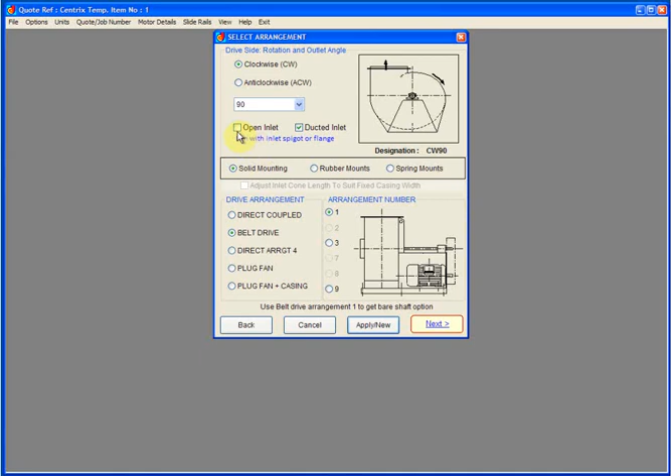So let's do that. This particular fan design has an inlet cone spinning, and what we can do is manipulate this area here to suit different types of inlet cones and the way they're fastened to the casing. Let's have a look at this.

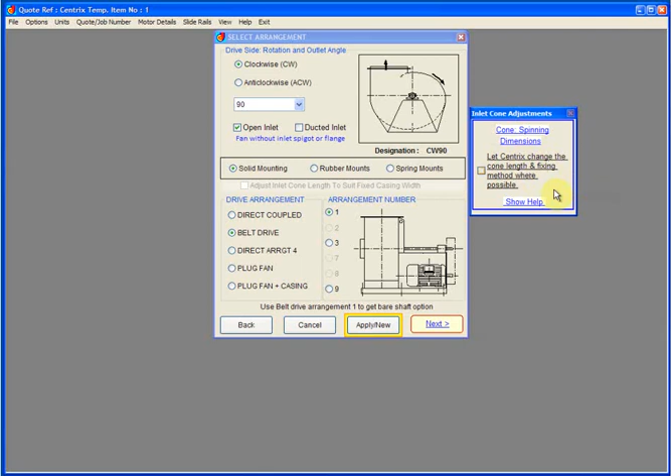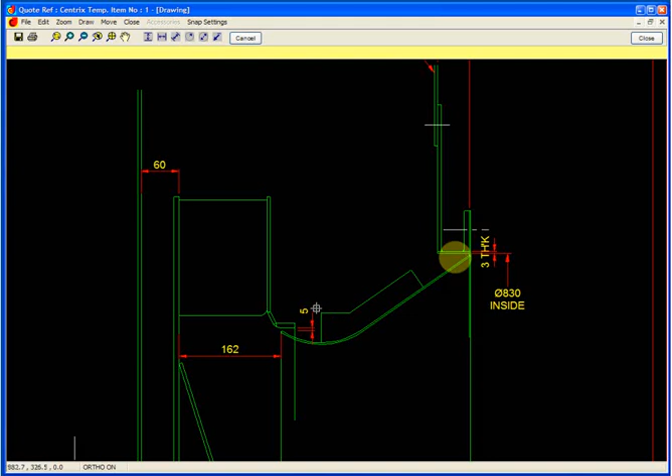At the moment this is unchecked to let Centrix change the cone length and fixing method, so we'll leave that unchecked and apply new here, then next and next, and look at the inlet assembly. This particular fan has a spinning for the inlet cone which needs to be fastened in the correct location, so it has this offset inlet flange so that the inlet cone and impeller are in the correct location.

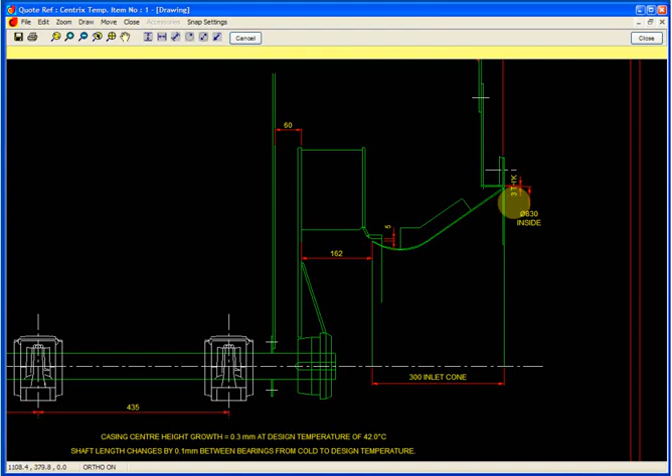That looks okay. So it's an open inlet fan but with this extended section, which means that for an overhung impeller that's going to be fine, but if the impeller was between bearings, then this might cause a bit of a problem as regards fixing the bearing to the side of the casing.

So I'll close that. I'll go to the arrangement number and handing again, and let's see what difference this makes, if any, because we're still using a spinning. Let's say apply new, we'll say yes, then next, next, and have a look at the inlet assembly again.

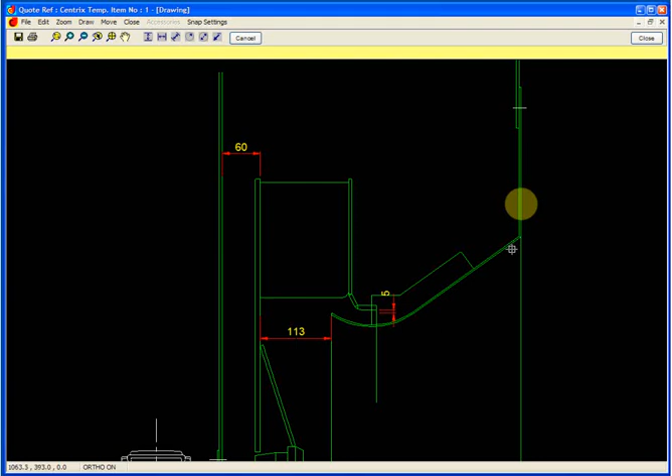Okay, so what we can see is that the spinning obviously didn't have a full flange, so Centrix has maintained the length of the spinning, but of course now it's in the wrong position relative to the impeller. So let's close that and see what we can do about that.

So let's go back to our arrangement number and handing, and we can maybe change the spinning by going back to the casing material selection, unchecking the spinning option. We'll apply that, say next.

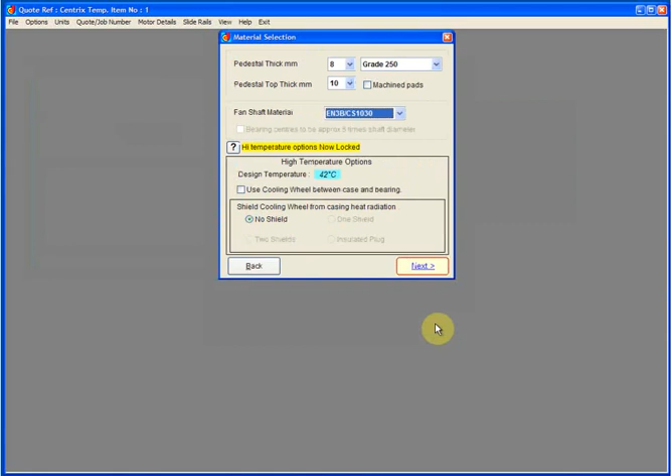Now we can see that the cone is fabricated. So let's say next, next, and have a look at the inlet assembly. And now we can see that the length of the cone has been adjusted automatically by Centrix, and it's in the correct position to get flow around into the impeller.

So let's just have a look at that again, and see what else we can see here. We can look at dimensions. So we can see that the single width cone length in the database is 300 millimeters, and Centrix has changed the cone length to 200 there.

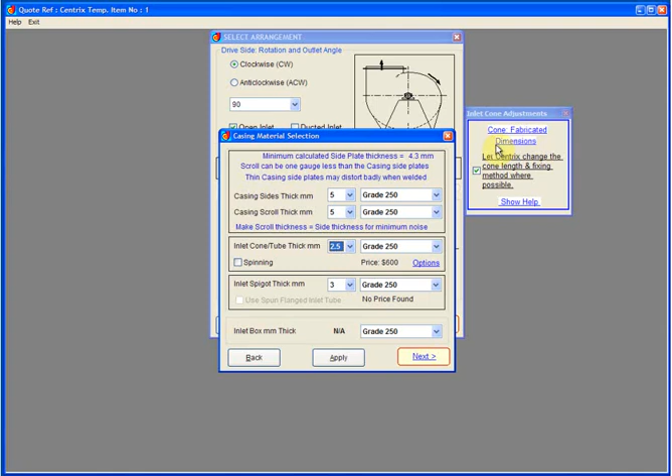We can also change some other dimensions here if we want to play around with these sorts of things, but normally you wouldn't need to, but it's there if you do. For example, we can close that. We could go back to the spinning. Okay, I'll click that, so we're spinning.

Let's just go next and next and draw the inlet assembly. Okay, so now we can see that the spinning's in the wrong place again, as it was before.

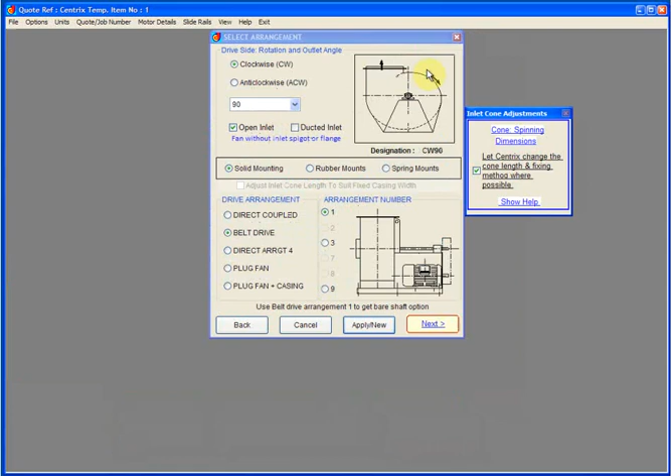So let's now look at these dimensions again, and let's position the cone at the impeller setting. We can actually look at that here. We'll say apply and draw here. So now we can see that the cone length's been maintained, and it's in the correct position, but now we would have to do something in this area here.

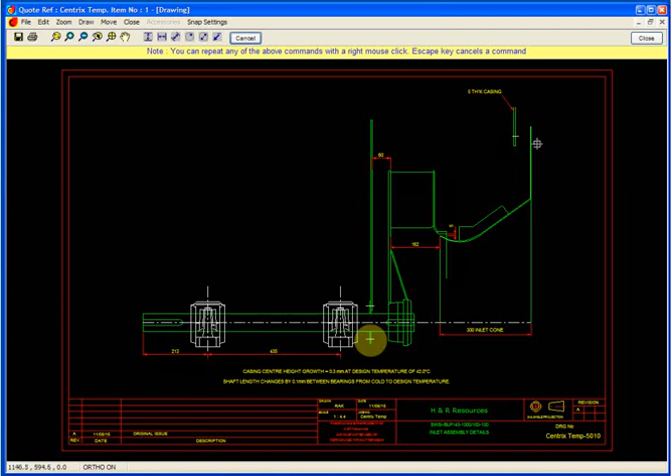And this is where we can say, okay, well, let's leave it. Next, next. So now we're back to the original method of fixing the inlet cone.